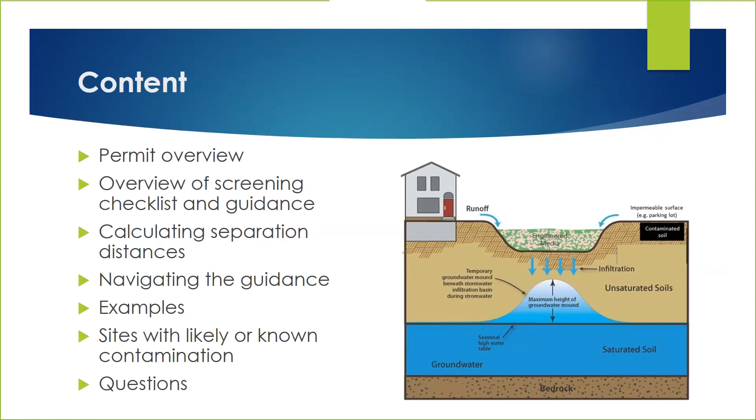Questions throughout. So here is the permit language. The permit prohibits permittees from constructing infiltration systems where infiltrating stormwater may mobilize high levels of contaminants in soil or groundwater. And of course, there's a couple words there: may mobilize. Mobilize, what does that mean?

So we wrestled with this when the language was being developed, and we landed on this idea of having to complete a checklist. We don't often like to take people outside of the permit to a checklist or guidance, but we felt this was a good approach. So permittees must either complete the MPCA's contamination screening checklist, and if you are able to open this slide, there is a link there, or conduct their own assessment to determine the suitability for infiltration. Permittees must retain the checklist or assessment with the SWPPP. For more information, you can access the screening checklist at that link, and we'll go to that link later.

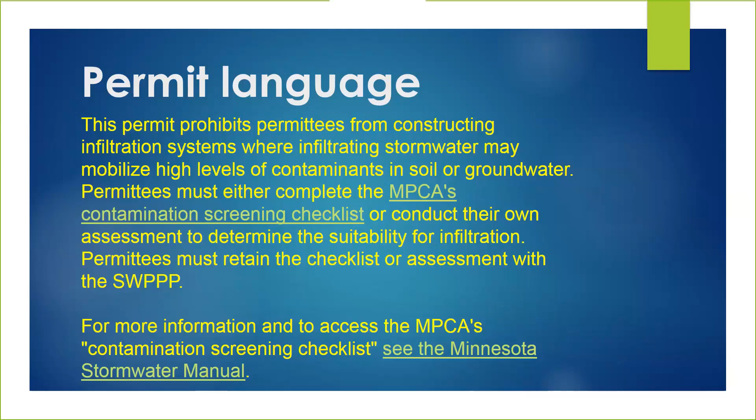So let's take a couple different scenarios. The first one here is: I'm pretty sure my site has contamination, why do I have to fill out the checklist? So the language previously would maybe give you an off-ramp here, but...

When feasible, infiltration is desirable. There are many benefits to infiltration: water quality benefits, hydrologic benefits, and so forth. It's the practice that's preferred, and we want folks to infiltrate if it's feasible at a site. So even if you think your site might be contaminated, going through the screening checklist is going to get you to take a closer look at your site and verify that, in fact, infiltration is not something that you want to do at that site.

There are often places on a site where you can infiltrate even when parts of the site are contaminated. In this diagram, for example, this little schematic, we might have contaminated soils and contaminated groundwater, but way up in the northeast corner, assuming north is up, is probably a good place where you could infiltrate. I don't have dimensions on here, but that might be a place in this particular example that you could infiltrate, in fact.

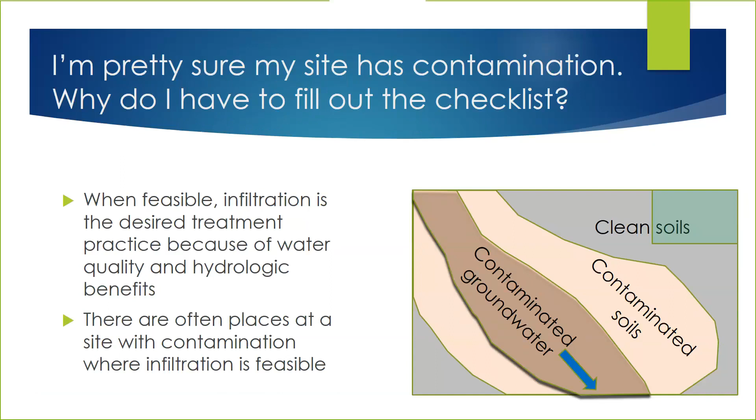I'm pretty sure my site is not contaminated, do I have to fill out the checklist? No, you do not if you meet the stormwater permit requirement of infiltrating 1 inch. So if you meet the stormwater permit requirement, you don't have to fill out the checklist. You only have to fill it out if you are not going to meet that construction stormwater permit requirement of 1 inch, retaining 1 inch, infiltrating.

However, it might not be a bad idea to do it if you're not 100% sure that there's no contamination at your site, and that's because there are liability concerns. If you are associated with the release, you become liable under Minnesota Statute 115B.03.

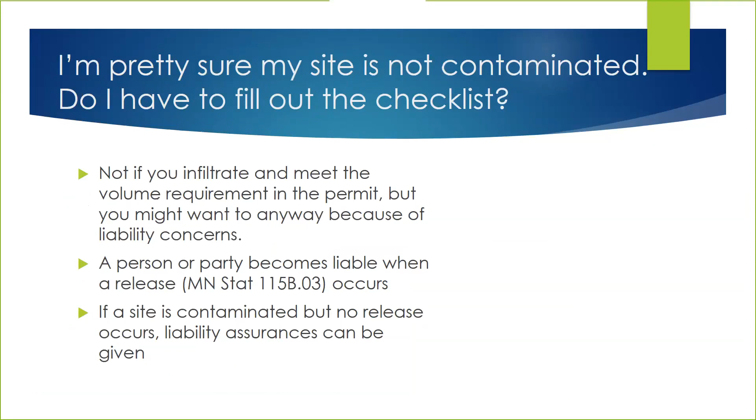This is a question that we received, and I'm not sure I understand the question exactly, but I'm going to take a shot at interpreting it. What do we do with geotech reports that focus on construction issues instead of possible contamination? When I read this, I interpreted it to mean that people maybe aren't doing, we're so used to doing construction details and addressing construction issues, that we're getting reports that aren't addressing this potential contamination issue.

And the simplest response I can give to that is, you should do this screening assessment before you ever really even get into the nitty-gritty and the nuts and bolts of infiltrating at a site. The screening checklist was designed to be fairly simple to do. If you think there might be contamination at your site, you really should go through this screening assessment before you actually get into looking at the infiltration system that might eventually end up on the site.

Mike? Yes. So that question came in through, wasn't my question, but it came in through me. My understanding of it was that frequently on projects, people are getting geotech reports, but they're focused on how the aspects of the soil affect the building on the site. The structural characteristics of the soils, any sort of potential structural problems from the soils, and then they're not seeing the data or information they need to make some evaluations on possible contamination.

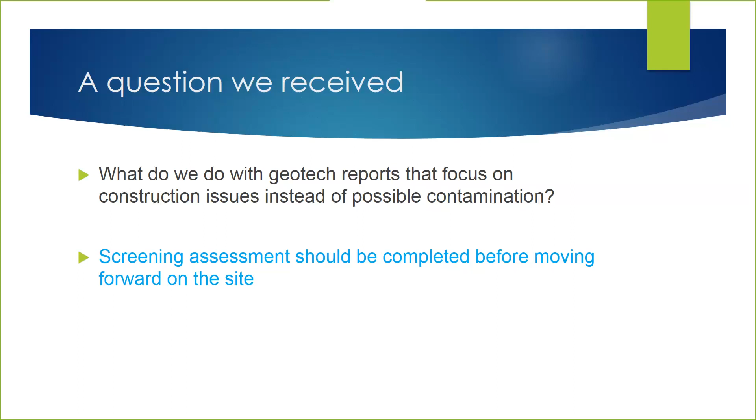So the first step is the screening assessment that I've talked about. We attempted to develop a method that does not require rigorous site investigation or sampling. But we want folks to justify why they're not infiltrating, because we really do want people to infiltrate when it's feasible. It's the best practice that's out there. And we don't want you to infiltrate when you're going to move contaminants or when you've got shallow bedrock and things like that. All that stuff is in the permit and in the manual.

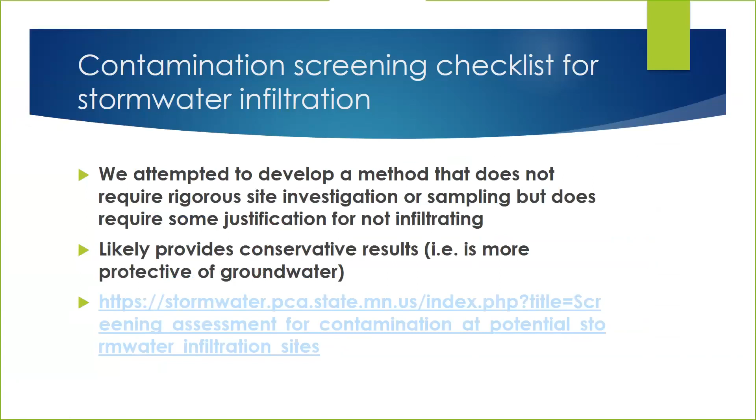Can you get far enough away from that feature to make sure that you're not going to have a mobility issue? So if we could bounce back to the PowerPoint, you'll see there's links in this checklist too. Go to the next slide. Oh, you have control. I got control, that's always a dangerous thing.

And we do have a page in the stormwater manual that talks about stormwater hotspots. So just type in stormwater hotspot if you're in the manual, and you'll go to that page and find out what all of those are. Do I still have control of this?

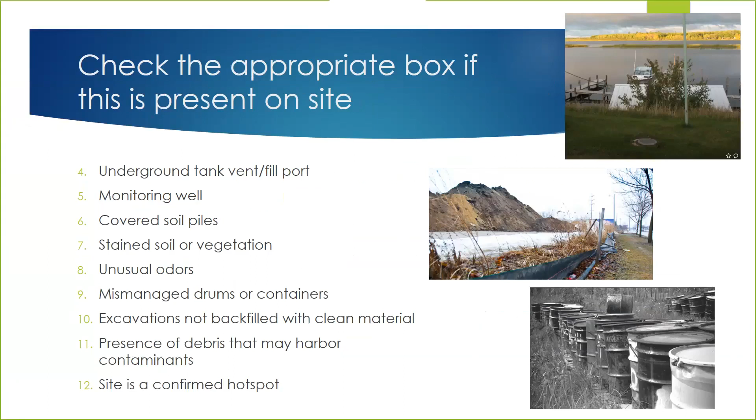If you checked any box 4 through 12 and can't clarify if it is a concern, here's what I mean: if you go out and see a monitoring well, every monitoring well should have a tag with a unique number. You can copy down that number, go into the county well index, look it up, and if it's just a monitoring well that the USGS put in for monitoring purposes, you're good to go. So just seeing these things on a site doesn't mean you should not infiltrate. You should check them out if they're there.

So if you can't really check them out, if you haven't been able to get a good read on exactly what it is, then you try to achieve separation from that feature.

What separation? There's always going to be a groundwater mound under an infiltration system. When you infiltrate, water builds up temporarily under your infiltration practice, and that mound spreads out radially. We wanted to identify how far out that mound extends. That's what we're trying to do. Is that mound going to extend out far enough that if there's contamination in groundwater, it will hit that contamination and start to move those contaminants? So we need to calculate that distance.

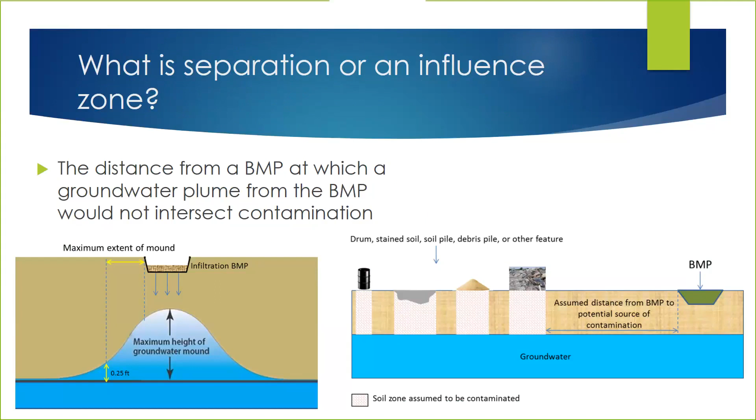It sounds fairly onerous, and it can be if you decide to get into rigorous models, but being the very thoughtful public servants that we are, we've actually developed some numbers for you. And I got Randy laughing, which is always good.

So there are three options here. You can just use the default values we have in the stormwater manual. You need to have two things: what is the soil underneath your BMP—if you've done your probes correctly, you'll know what that soil is—and what the aquifer material is, which you should be able to get from various sources. If not, you can always assume a worst case scenario.

For example, if you have a fine sand over a coarse sand aquifer, your influence zone is 75 feet. This influence zone is calculated using the USGS mounding calculator that we'll look at later, and whatever number we came up with for this scenario using that calculator, we doubled. So there's a safety factor built into the separation distance in this table. For example, coarse sand over a gravel aquifer, the calculator came up with 400 feet, and we doubled that to include a safety factor.

The second option I've already mentioned is using this USGS mounding calculator, and we'll open that up later and take a quick look at it. There are other acceptable methods too—you may want to do a groundwater model at your site, like a MODFLOW model or something like that. That's more than adequate, more rigorous than we're actually asking for, but we're not going to complain if you do that.

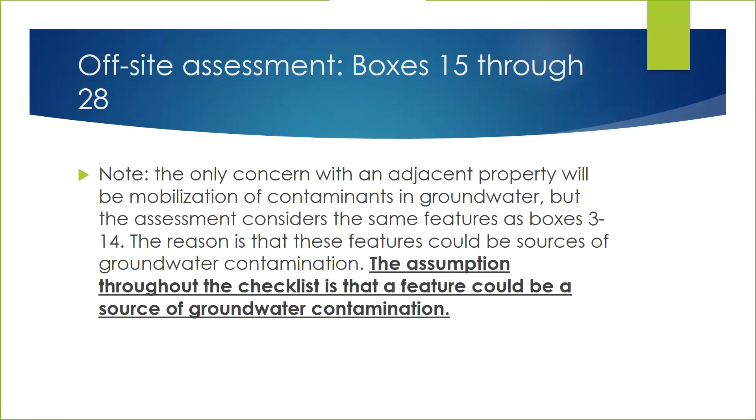So go to the next slide. So just a couple features of the checklist I already mentioned, as you have to go through both the on and off-site assessments before getting the green light to infiltrate.

You may choose not to infiltrate anytime there is a feature that might contribute to groundwater contamination. We feel this is the conservative part of it. You go out and you find a monitoring well, it doesn't have a tag on it, you don't know what that well is associated with, you can't achieve a separation distance, you don't have to infiltrate.

Just document it and keep that for your records. And we do believe that is fairly conservative, but we're in the job of protecting the environment first. Infiltration is always desired when it's feasible, but we don't want you infiltrating if there's any chance you're going to mobilize contaminants.

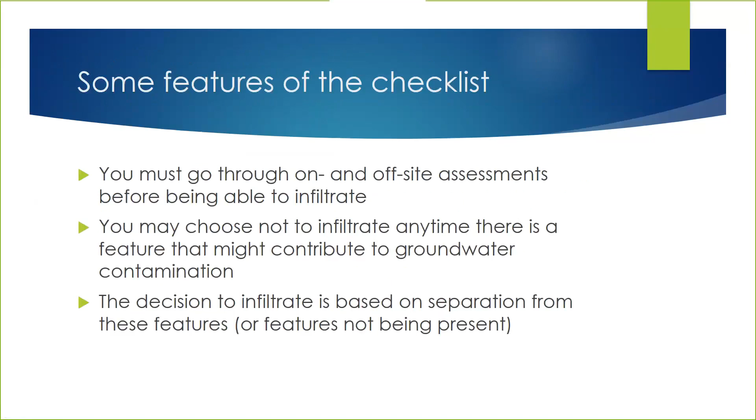And the decision to infiltrate is based on separation. I've talked about that. Next slide.

So I'm going to quickly go through this mounding calculator that the USGS has developed. It's based on the Hantush method, for those of you who are familiar with that. You need 6 pieces of information for it.

It looks onerous, but of course we believe we give you pretty good information to help you find these 6 parameters that you're going to need to input. You're going to need the infiltration rate of the soil at the site.

This is actually the amount of water that you're infiltrating. So if you have a rain garden that's 1 foot deep, that's your infiltration rate. That's a little bit different than I think we're typically used to thinking of infiltration rates. It's actually the amount of water - that's the way it's phrased in the calculator, infiltration rate - but it's actually the depth of water that you're infiltrating through your infiltration practice.

The aquifer-specific yield and aquifer hydraulic conductivity, and we'll have table values that I'll show you for those. The length and width of your infiltration practice, that's something that you should know. The duration of infiltration, that's going to typically be 48 hours or less.

So if you're on a really sandy soil, even though the permit requires you to infiltrate in 48 hours, you're going to want to actually input the length of time that you think it's going to take for that depth of water to infiltrate.

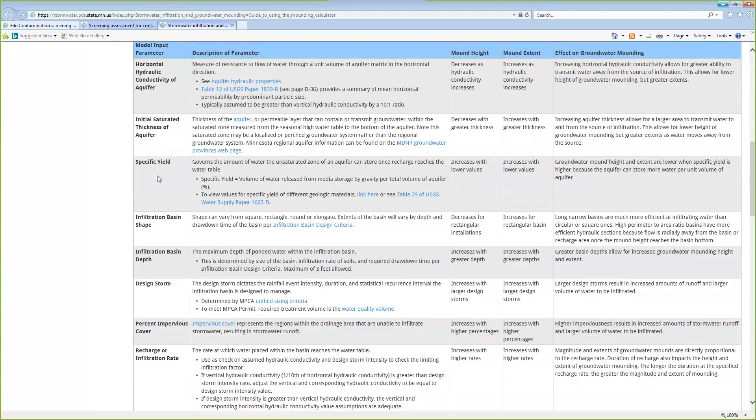Scroll up, and here's the table that's got links to all of this great information on determining hydraulic properties of your aquifer and specific yield. Let's click on one of them, for example, the link for specific yield. This will take you to a table that tells you if you have a coarse sand. These are from a whole bunch of studies, shown in the footnote. If you want your average specific yield, it's in column 18. So if you have a coarse sand, your specific yield for the calculator is 0.27.

So if we can go back to the other tab. I meant to call somebody else, sorry about that. So that table will have links to all kinds of information.

Let's click on the actual simple tool developed, up at the top here. Click on that, and that opens the USGS website, and the Excel file is right here on the right. Click on that and open it up.

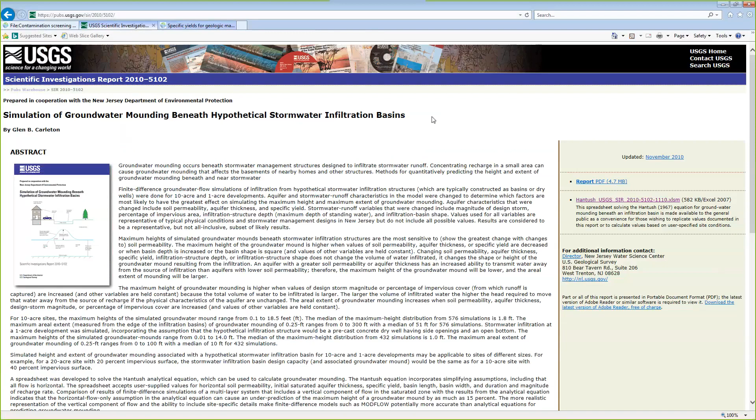Well, okay, close your eyes. I'm going to try to walk you through this.

When you open this Excel spreadsheet, you'll have those 6 inputs that I talked about before. Using the tables, or if you already have the site information, you're going to need those. Let's go back to the PowerPoint maybe.

So you're going to need to input these 6 values. Infiltration rate is going to be the depth of your practice, so if you have a 3-foot infiltration basin, it'll be 3 feet. Specific yield you'll either know or get off that table. Hydraulic conductivity, you have to know your material, or you can get it off the table if you don't know it at the site. The length and width of your infiltration basin, you should know.

The mounding calculator spreadsheet will ask for the midpoint of that. So if you have a 50 by 50 infiltration system, you would input 25 feet in that cell in the spreadsheet, and it says that there.

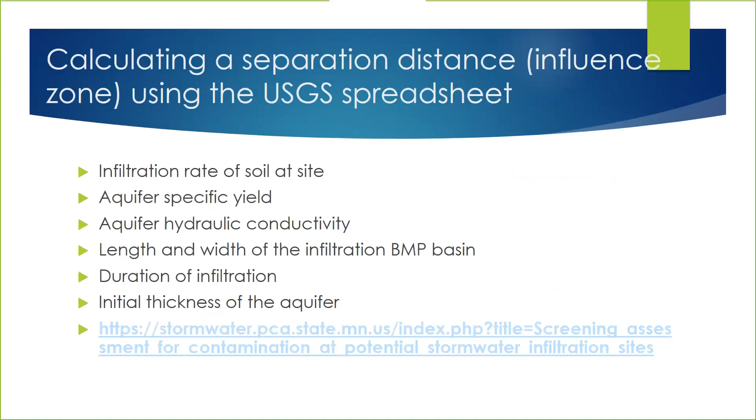One thing to keep in mind when I hear this discussion is that most, not all, but most infiltration systems are not going to be particularly large. Now, obviously there are exceptions where we've got big infiltration systems, underground systems that infiltrate an awful lot of water, and the mounding calculator will give you a big mound. But if we're talking about fairly small BMPs for the most part, unless you've got really coarse materials, like coarse sand over gravel, these separation distances are not great. So I would really want to stress that.

If you go to a site and you go, oh my gosh, there's a groundwater plume clear on the other side of my site, and it's 1,000 feet away, you're probably going to be okay at that site. There are exceptions, so I'm not telling you to go ahead and assume that, but just keep in mind that groundwater moves really slow, and these mounds are not huge under most of these systems. So just something to keep in mind.

So I had a question related to this: in older cities, you're going to run into situations—I think it's called urban land, urban soil—where it's essentially whatever's going on over 40 feet is God knows what, something that got demolished, or an old brickyard, and it's impossible to determine. You could do soil borings at 1-foot intervals and you still wouldn't know exactly what's going on. How do you address sites like that when you're trying to apply this table?

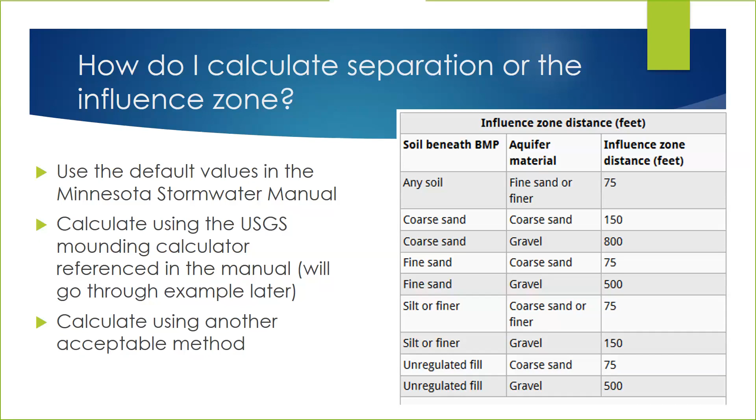Okay, so could we go back to where we were, wherever that was?

I was just questioning, in a lot of these, if we can't absorb stuff. I've put in a lot of sports fields over the years, which are sand-based fields. Is there a way to line them so you could actually have great landscaping and absorptive capacity in that first foot or foot and a half of material, giving you a landscape look without contamination underneath, like we did at the University of Minnesota where the TCF stadium went in.

Those three grassed areas out there are all sealed because of what was there previously. Those sites are all lined with EPDM liner, and then there's a drainage system that holds a certain amount of water and lets the filtered material beyond that go to the watershed clean.

Obviously, if you can maximize your treatment, that's always a desirable thing. Okay, let's go—I'm going to do a couple examples. Those questions that got forwarded to me will come up later. So let's go to the next slide.

It's hard to give concrete answers to some of these, but this is one that came to us a couple days ago. They want to put in potentially a permeable parking lot and maybe an infiltration system. They have a building there shown in gray, and there were two underground storage tanks at the site.

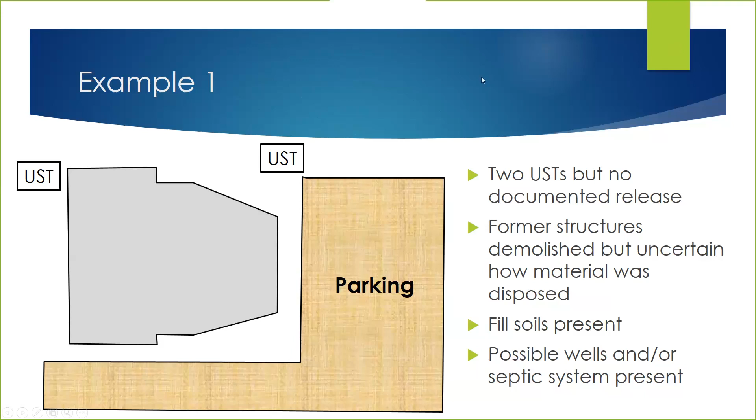Go to the next example. This example is actually in the manual, the wiki. I don't get into the detail about sampling, because in this particular example it fails the screening checklist, and in the wiki we've got it as a failure. Don't infiltrate at this site.

We have a proposed swale shown in the yellow or green, and it's over B soils, so good soils for infiltration, with no current or past history of contamination. We've got this above ground fuel tank in the red to the north of the site of the proposed swale, and we have separation distance. We've got stained soils shown in whatever color that is at the bottom there.

What color is that, Sean? Tan? Yeah, I was going to say tan, but I didn't want to embarrass myself. I put clothes on every morning—I go to my wife, does this look good? And she goes, yep.

And then the separation distance, we calculated as 200 feet, and that includes a safety factor of 2. You can see the scale up on the top. We would fail at this site because those stained soils are within 200 feet of our proposed swale.

However, in the manual, that's where it stops at this point in this example—we say you're done, you failed. But let's take this example a step further. We want to infiltrate here, or at least we want to pursue potential infiltration. Let's go to the next slide.

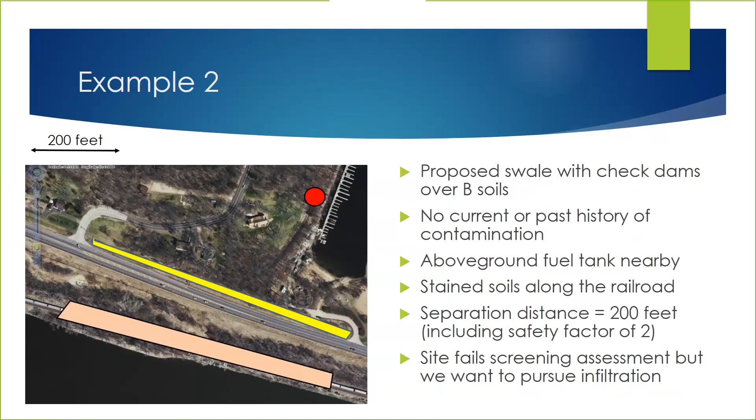So we go out and do a bunch of borings, shown as stars, and the results are off to the right here. What we find is we compare those borings, and the groundwater is clean under the site, but we find there's some copper in some of the samples. So we report that copper in the table in the first column, and we have a concentration in the soil which we compare to the SLV.

That shouldn't be the SLV, I'm sorry—the soil leaching value is in the far right column. That's the number we don't want to exceed. If we exceed that number, we have a potential for releasing copper to the shallow groundwater at concentrations above the drinking water standard. So we have two situations where we're above that SLV, and a third one where we're pretty close, but we've got four places where we're good to go.

So on this site, you could infiltrate. If you understood groundwater flow and felt confident in the data, and did all the QA/QC right for sampling and analysis, you could infiltrate in the green portion, but not the orange portion of that swale. It would be your choice what you want to do. This is an example of taking it to the next step, where the screening checklist says you fail, the construction stormwater permit says you don't have to infiltrate, but you really want to give it a shot. This is a light example of the investigation you might need to do. It doesn't cover all the QA/QC you need to follow, but obviously we want to make sure you're getting good samples.

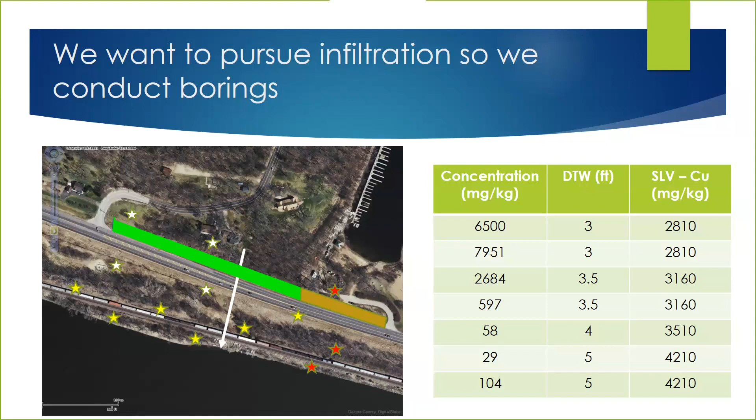Scenario 3 is a brief summary: off-site contamination. If you're down gradient of the site from a groundwater standpoint, or up gradient for that matter, you want to make sure you have that separation distance. This infiltration practice, the mound, shows an example of how the mound can extend to a contaminant that might be at the groundwater table off-site. You're looking for that distance - I believe it's 0.02 feet, I could be wrong, I'll have to double check, it might be 0.25 feet. But there's this distance the USGS recommended, that at some point where the mound is that height or less, you should be good to go. Mike, what does DTW stand for? Depth to water - the depth to the water table from the bottom of your infiltration practice.

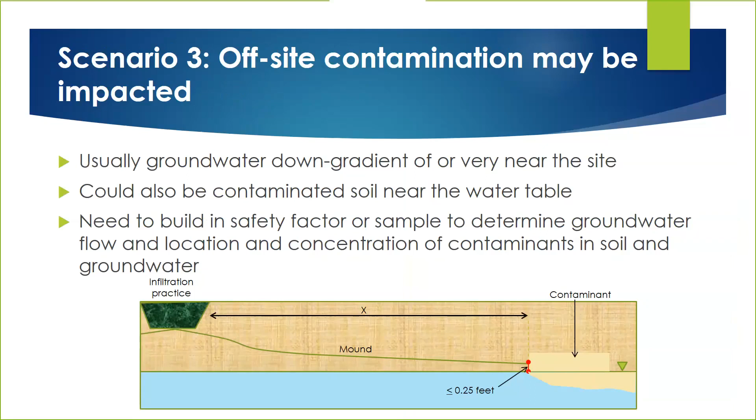I'm going to look at some of the questions we've received so far in the mail, and if you have questions, keep asking them. I'll do my best to answer some of these. The first one I addressed: what do we do with geotech reports? Second one: how do we address spacing when we have insufficient information about the location of contamination, the way the plume is moving or changing, and groundwater flows?

Randy, you sent this question to me, maybe you can enlighten me, but this looks like a site where we're pretty sure we've got contamination and a plume, and the construction stormwater permit would say at this point you don't have to infiltrate - you failed the screening checklist. So this question isn't really applicable to the construction stormwater permit if that's the case. However, if you do want to infiltrate, you need to go do a proper investigation and define the plume. We have guidance in the manual, I'll show you where that is in a bit. That takes you to guidance about how to do a site investigation, and you'd need to do that to address the spacing issue. If that addresses the question.

One note of caution here - and Rebecca, get ready to throw something at me if you want - but there's lots of different scenarios out there. You have different types of chemical compounds: BTEX compounds typically associated with gasoline, and chlorinated compounds associated with dry cleaning, for example. They're completely different animals. We're not saying go ahead and infiltrate if you think it's BTEX and don't infiltrate if it's chlorinated, but be aware that the level of concern between your contaminants really does change. BTEX compounds most of the time will degrade in groundwater within a certain distance of the source. A chlorinated plume is likely to go on for a long way.

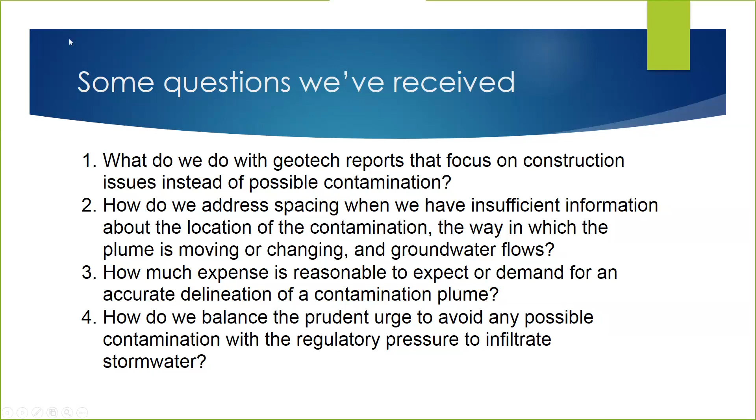I'm not exactly sure what page it's recommending, but I think I have an idea. The guidance on a certain page recommends creating a groundwater model if there's known contamination near a desired infiltration site. What about collecting empirical monitoring data, and how does that play into your recommendations? Monitoring, if done properly, is always, I think, a preferred approach to modeling. In fact, monitoring is good to get information to feed a model such as MT3D or ModFlow. You wouldn't want to build those models on table values if you could go out and collect information instead. So monitoring is always a better way to go about this.

Empirical data - you have to take it with a grain of salt, if I'm understanding what is meant by this. For example, when I talked about using the USGS mounding calculator and using those table values - that's why when you use those table values, we recommend plugging in a safety factor.

I'm going to sidetrack a little bit here and tell a story. When I took a ModFlow training class many years ago - I had hair back then - one of the instructors was actually the author of the ModFlow model. And there was an engineer in the audience, and I'm going to insult engineers a little bit here, he was all about numbers - what number do I have to get, what significant digit do I need for my on-site hydraulic conductivity? And the guy who wrote the ModFlow model said, I just look it up in a book.

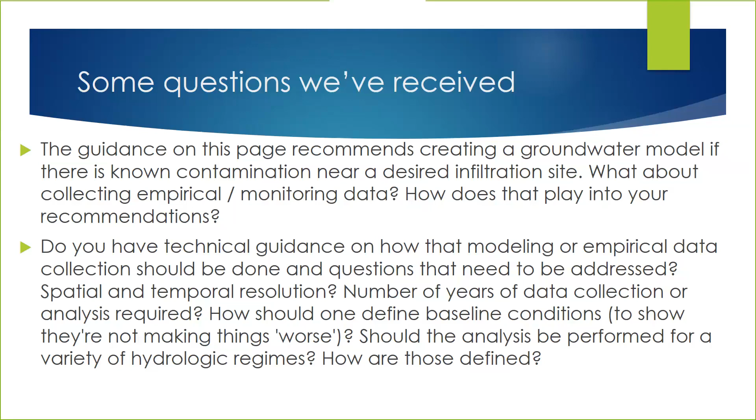Is there no technical guidance available? Who can we contact to discuss these topics and gain insight in developing a modeling plan?

This again is for sites that have known or very likely contamination. As Rebecca stated, there is guidance out there, and that's what we direct people to from the wiki. But I'm sensing, based on these questions and some of the others we've received, that there might be a need to develop some additional material, to make it a little bit more accessible, maybe is the way I'm phrasing it. So we can talk about that internally and work on it.

As far as contacting folks, you can certainly contact the stormwater program if you have questions. We can't provide assurances to people, but we can look at what your questions are and try to help you answer them as we go along. And that's hopefully after you've talked to your environmental professionals and they've helped guide you through what to expect next, and what involvement you'll need between the two programs, the VIC and the Petroleum Brownfields program or Petroleum Remediation program if you're on an active leak site. So they'll hopefully help walk you through those steps.

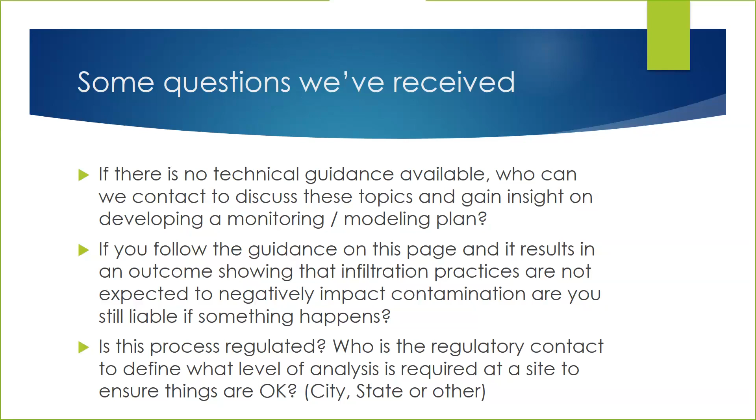Okay, if we can move to the next slide, unless there's questions. At this point, I want to take folks on a quick tour of the manual, just to show you what's in there. If you could click on that link. I'm going to move over here, so hopefully I'll try to talk a little louder.

So this is the main page called Stormwater Infiltration in Contaminated Soils and Groundwater. And like all our wiki pages, it's got figures and it's got warnings. I recommend that you read the warnings. Whenever there's a warning in the manual, it's related to a construction stormwater permit requirement. So that's what this warning is saying here, that it's prohibiting infiltration when you're going to mobilize contaminants.

So this is the portal to this page, and you can see that we've got several pages here that we have developed and linked to. Let's go through each of them really quickly. Right-click on that and open a new tab. Open it in a new tab, and we'll just then go to that tab.

This is just a general information page, and if you hover over the page contents here, it'll tell you the types of contaminated sites and likely pollutants. So this kind of gets a little bit at that question earlier about what you might encounter at certain types of sites. We can refine that better. But if you're at a brownfield site versus a tank site, what are you going to potentially encounter there? What makes a site contaminated, and that's where we bring in the risk numbers, the HRLs and the SRVs, and those kinds of things. And then some other general information.